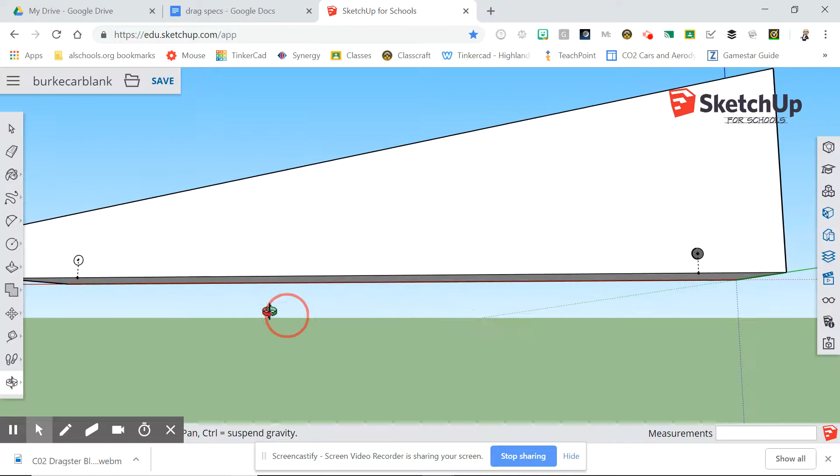So what I've got here is I've already done the one hole. We are going to check out and do the second hole for the axle. If we look at it, these holes should be lined up. If I wanted to, I could take and do a measurement line, right from the midpoint of my measurement line, which is my guide point, and come straight across to make sure it is a nice straight line.

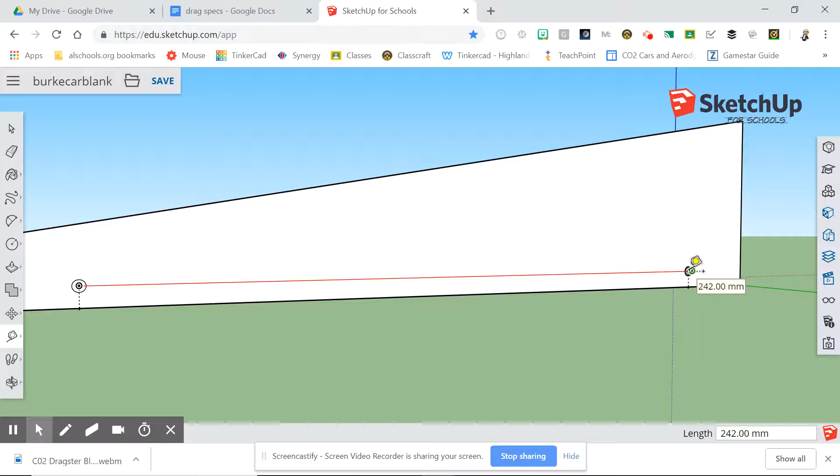I am 242 millimeters roughly to the hole. 242 millimeters is where we need to be. So if I flip over and look at my dragster specs, the wheelbase is no more than 270 millimeters, so I'm well within where I need to be.

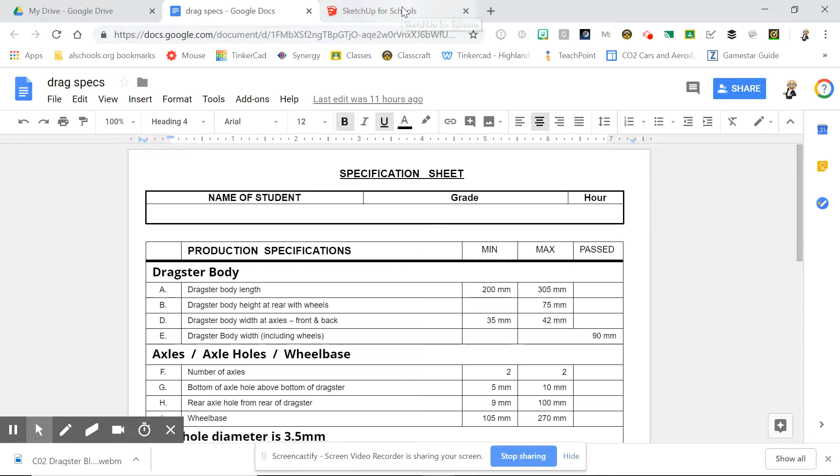So my hole is set, it's ready to go. I want to push pull this out, so I'm going to do this again to show you guys. I'm going to change my orbit so I can see the front of my model. All you have to be able to see is the side you're going to be pushing through on and the far corner, so you can get one of the endpoints—doesn't matter if it's the top or the bottom endpoint.

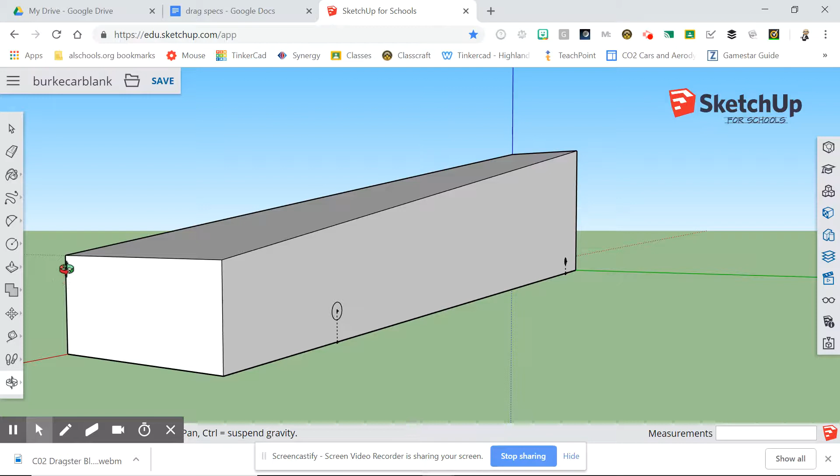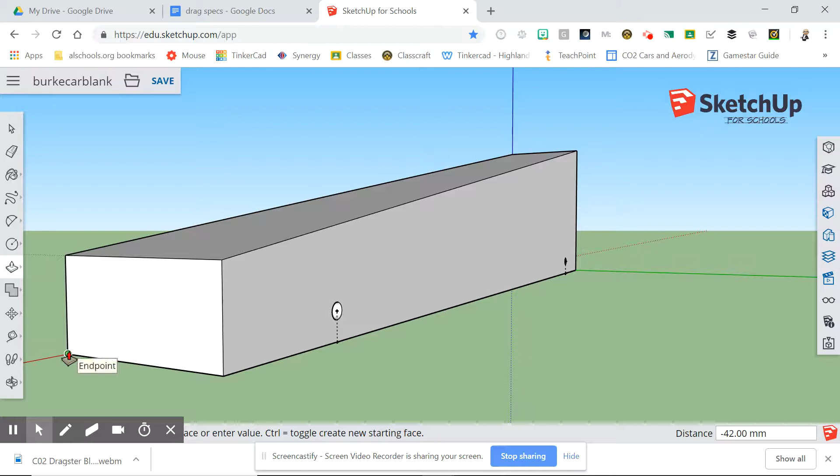I'm going to select my push pull tool, select the actual axle hole, and click on it. I'm going to start pushing my model through, but instead of going straight through, I'll move my mouse all the way over to where I see endpoint. Once I see endpoint, I click, and I've gotten rid of all of the hole material.

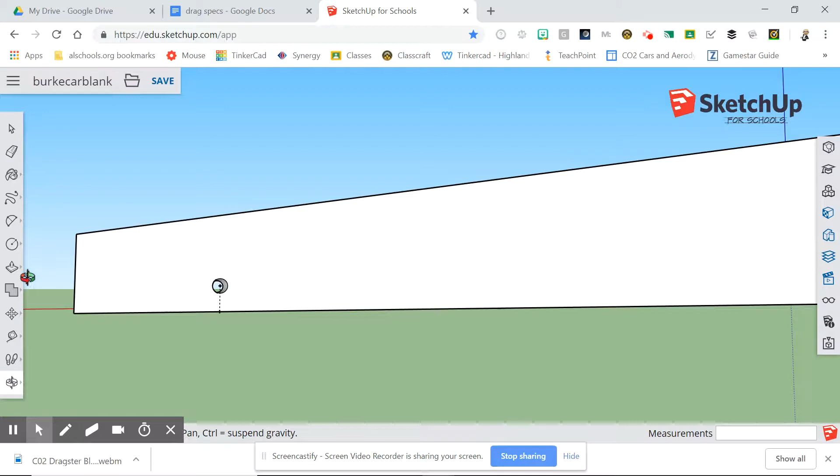So now you can see if I move my shape, I can see right through my model. So now comes the fun part. You've got your model, this is the base. If you haven't already done so, make sure you save your model, because this is your dragster blank—the bare minimum dragster blank.

Now you can start to design your car however you want to. There are some really cool things we can do with this, and I'm just going to show you a couple. The first one is I can use my line tool and decide I want a better angle of attack. I can go from this endpoint, come straight up here, and go right to this edge, and I've created a new line. Once I've got that line, I use my push pull tool and click on it.

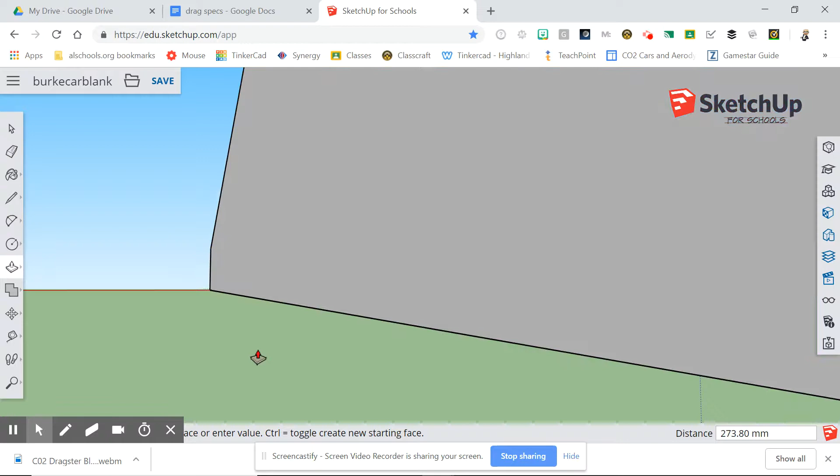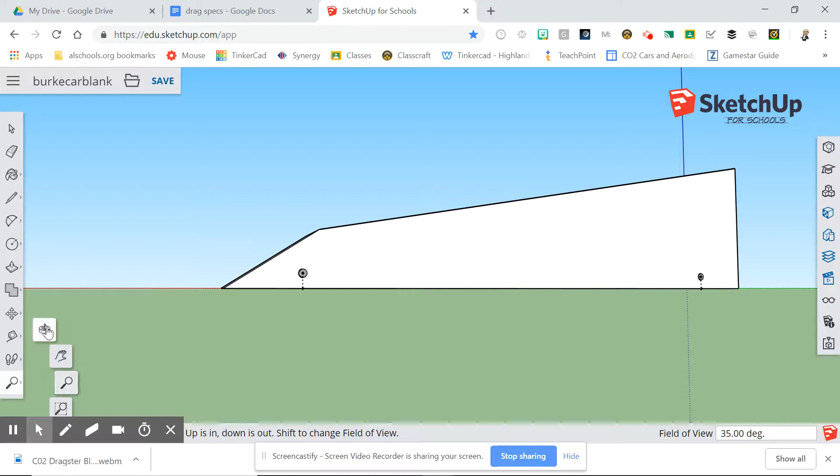I push this all the way the other way, so it goes to the far side. It'll turn that weird color, I click the button, and it disappears. So now when I rotate this around and look at my car using my orbit tool, I've got this wicked little front that I just made, right? But maybe straight lines aren't your style, or you don't want to cut your straight lines in there.

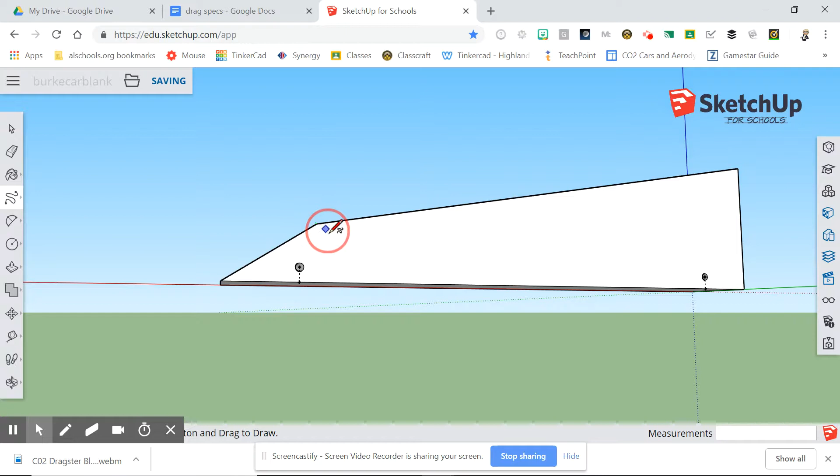So I can go back here and I'm going to use the scribble tool. To use the scribble tool, you find your starting point and hold your button down. You have to be a pretty good artist for this one. I'm going to come in here and connect it back up to my edge again, so you have to have a starting and ending point that are along the same edge.

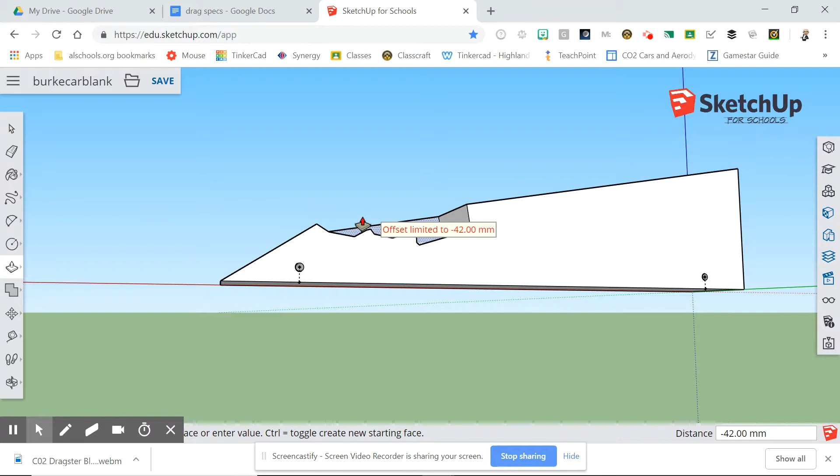I then am going to take my push pull tool again, find that new section that I just blocked off, and push it all the way through till it gets to the edge. Oh, let's get this going all the way through. Once it gets to where it says offset limited, click my button, and that shape is now gone.

So when I've got my orbit tool here, look at what I have just created just with what I've got here. So I have got my new shape here.

Last thing that you could do if you want to get some clean arcs or some clean lines is we go to our arc tool, which is going to be the 1, 2, 3, 4, 5th one down, and you want to choose the one that says the 2-point arc tool. You're looking, there's a 3-point arc, there's a 2-point arc, there's an arc, and then there's a pie. So we're going to do the 2-point arc tool.

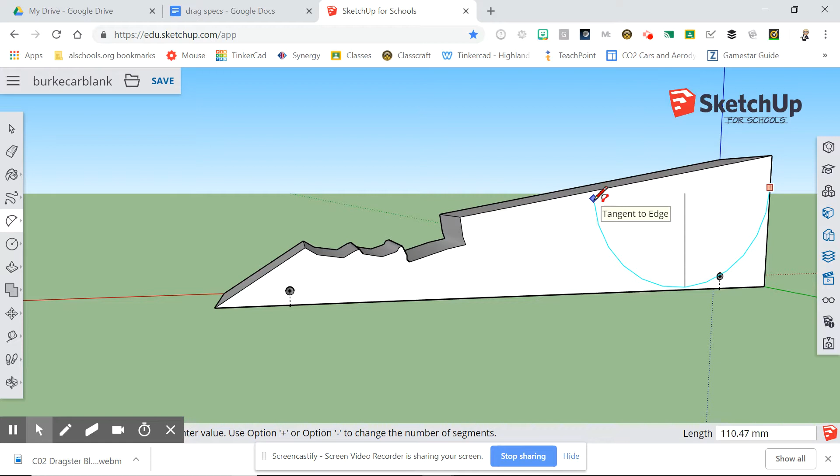So the way the 2-point arc tool works, we click on that. We're going to find where we want our starting point to be on the edge, and go all the way across. Don't worry about how it's setting up there. We're going to go all the way across to our next edge, so we get on here where it says tangent to edge. We're going to make it here, put it up on the edge.

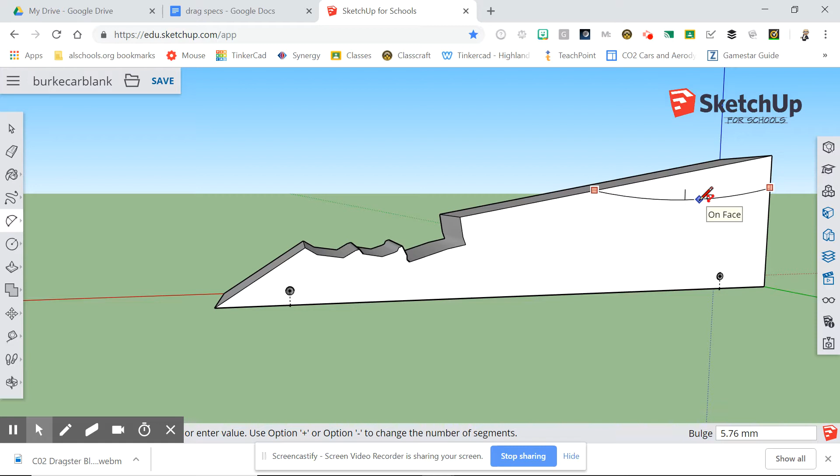And then what we do is when we bring our back in, we move our pencil up and down to get the arc that we would like to get. Now, one of these I might have messed up with where I'm at, because I think I might be into my hole. So we're going to find out here real fast, but I'm just doing this so you can see what it would look like.

So if I'm going to cut way down here, once I click my third button, I've got my line on there. So now I, again, would use my push-pull tool, and I go on the top, and I push all of my material away, click it, and I did not get it.

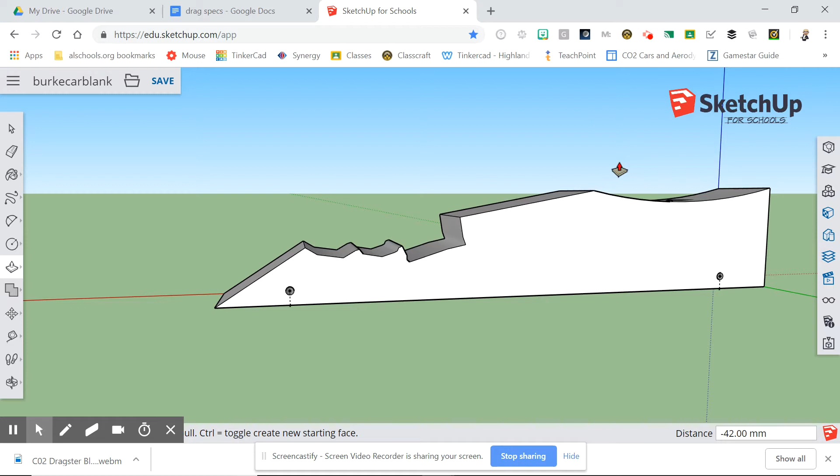But what we want to do, let's check to make sure that I didn't get too much off. So I'm going to spin this all the way around, and I can already tell you that I did because I can see my hole. So right here, see, I can see on the top, I can see that hole there.

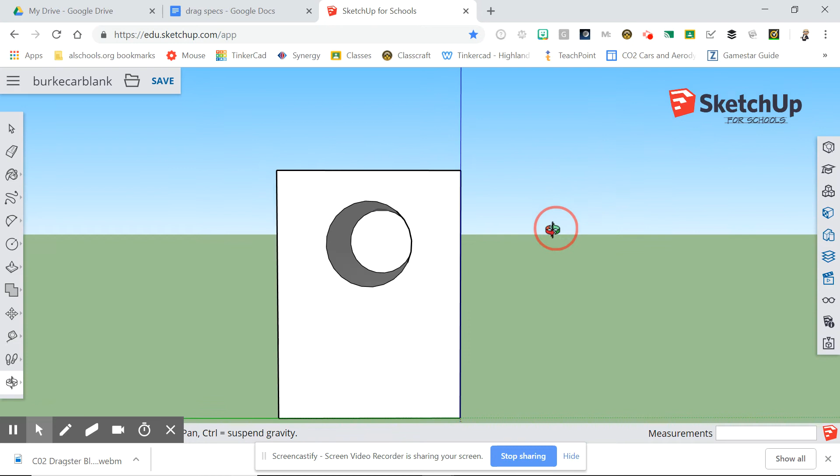I cut too much off, so I don't have enough depth for my material to get to where it would pass inspection. So I would have to go back and redo and change some of that to make sure I get that, because I have to make sure that I have at least 3 millimeters of material.

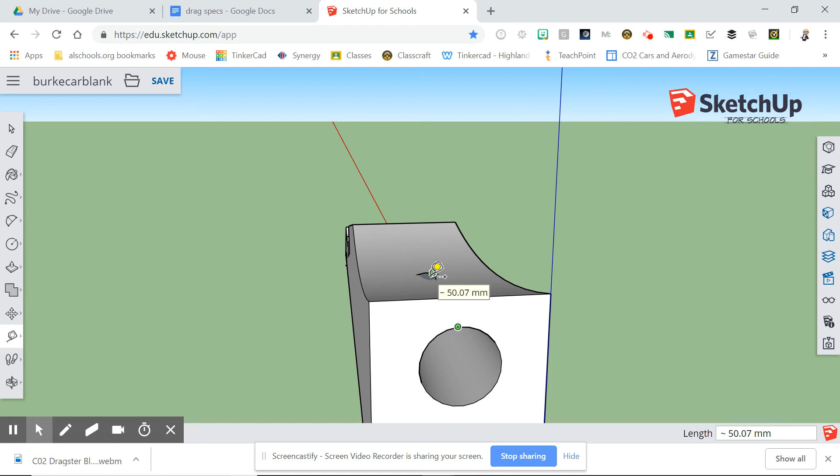So if I check on this one, I've got my measurement tool here on the top. I click on the end point and go straight up along the axis here to the other end point. I have a total of 50 millimeters on the front there, but because it curves down and I can see the hole in here, I don't have the full 3 millimeters.

So what I would do is I would just hit the undo button, and I would go back and redo that again and change my arc to get something that's a little bit better.

So those are some quick tools to help get you create the most aerodynamic and awesome dragster that you possibly can. Good luck.